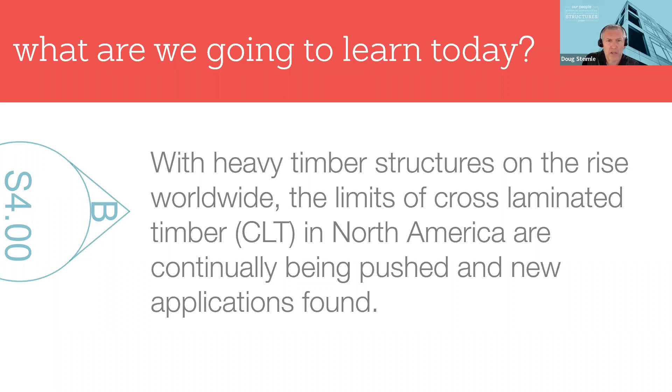So again, Candlewood Suites. This is actually on the Redstone Arsenal, which is a U.S. Army base down in Huntsville, Alabama. That's where this project is. We're going to learn about its material strengths, labor advantages, things like that. So why would we want to use this on future projects?

I do want to mention, CLT is cross laminated timber, and I'll get into describing exactly what that is. We're gonna address all kinds of aspects of what cross laminated timber is. But again, I'm going to assume that you know nothing. Hopefully, even if you do know something, you'll get some things out of this, I would imagine.

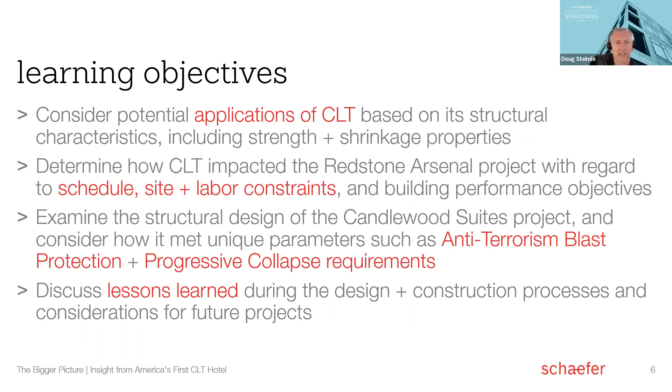So, cross laminated timber, here it is right there. Commonly known as plywood on steroids. The difference between cross laminated timber and, say, glue laminated timber is that the material goes back and forth in a crisscross manner. Glue laminated timber would have all of the members in the same direction, usually the same grade. It could be different grades of lumber, but essentially the same lumber, same glues. It's just how it's laid up.

But cross laminated timber can be manufactured, depending on the manufacturer, 10 feet wide, 65 feet long. Not everyone does those dimensions. In fact, I don't know that anyone does 10 by 65, but 8 by 65, yes, or 10 by 40, yes. So again, part of the reason why we need to really make sure we know which manufacturer we're dealing with.

So going into exactly what cross laminated timber is, one of the most important parts of the process is this very first piece, kiln drying the lumber to 12% plus or minus 3%. Shrinkage is a big deal. We're going to talk about wood shrinkage for a good chunk, because one of the benefits of mass timber is it doesn't shrink a whole lot, which is great. But that 12% is important. Typical kiln dried lumber, when you're buying it, is around 19%. So this is dried to a much lower moisture content.

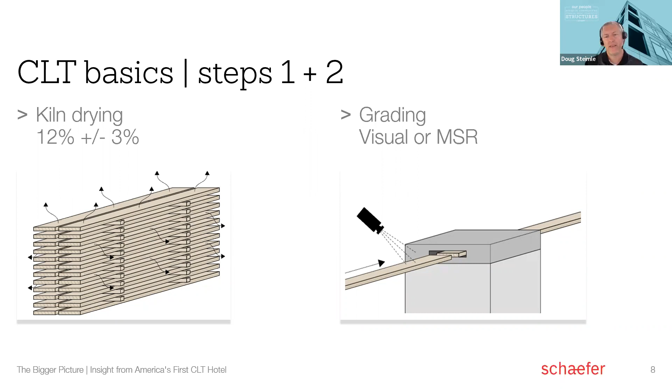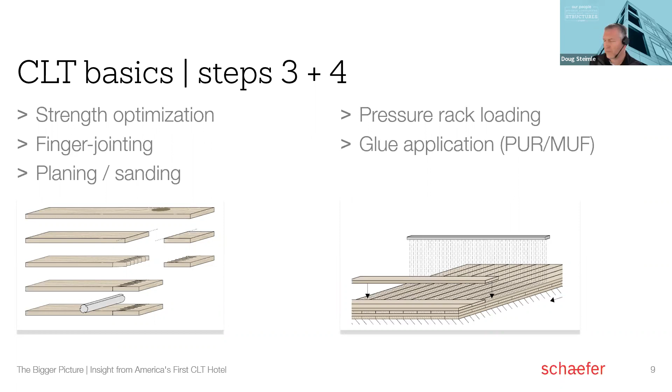Then the material is graded, whether it's visually or machine graded. And then it's finger jointed so that you can have a continuous stud as long as you want, and you cut it to the right length. Then you put layers of glue down between the two, you pressure pack it, and then you cut it to whatever shape you want. The precision of that cutting is just amazing. It's far more precise than really any other construction material out there. Steel, concrete, light gauge wood. This is obviously wood, but I'm talking about stick built wood. This is very, very precise.

In fact, one of the challenges of mass timber construction is how precise it is and how not precise the concrete foundations below it are. So you need to build in some flexibility there between the two.

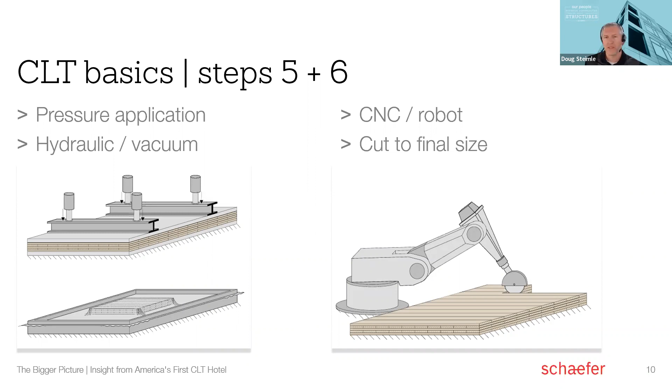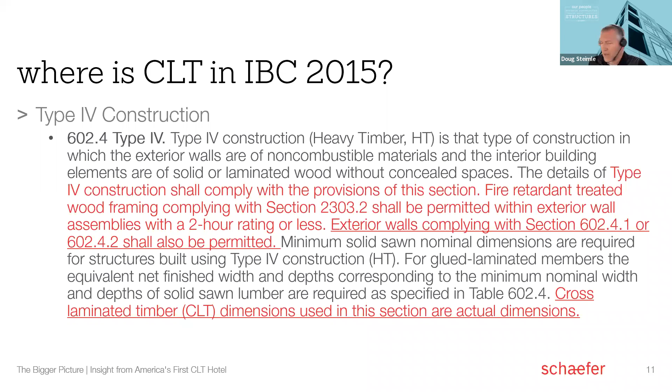So where is this in the code? It's actually in the 2015 code, under Type IV construction. I'm going to skip through that relatively quickly, but it's also in chapter 23. Chapter 23 references the APA PRG 320. That is the actual document that's used to define what cross laminated timber is. There's actually a newer version than what I've got shown there. So if someone off the street said, hey, I've got some cross laminated timber for you, well, it would have to meet those specifications.

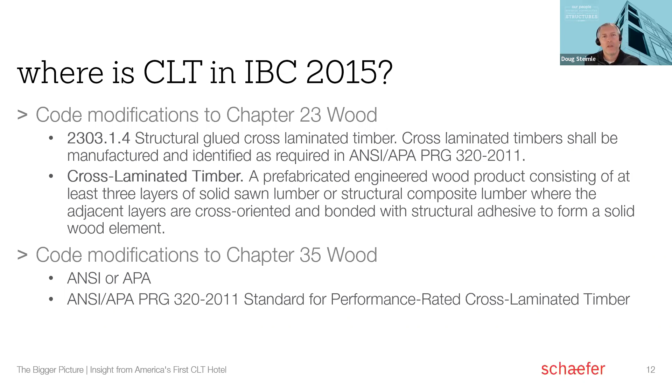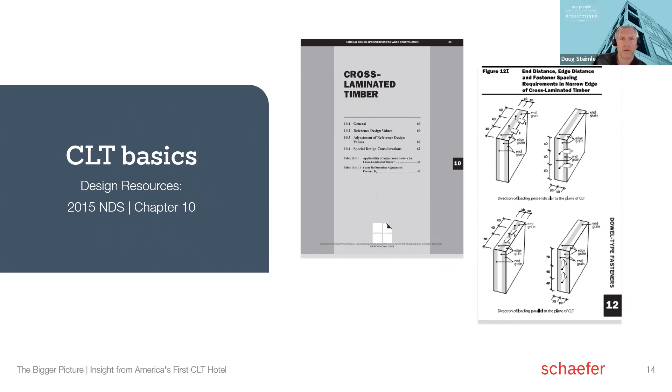The 2021 IBC is finalized, and there's huge changes in it, specifically regarding type 4 construction. Type 4 construction as it currently stands can go 6 stories tall. The 2021 IBC has taken type 4 and turned it into 4 different categories. There's HT, which is what it once was, and then there's the A, B, C categories. I believe type 4A corresponds to type 1A, so all the fire ratings you would have on a column, beam, that sort of thing, they match. And of course, type 1A construction is non-combustible and allows you unlimited height and areas.

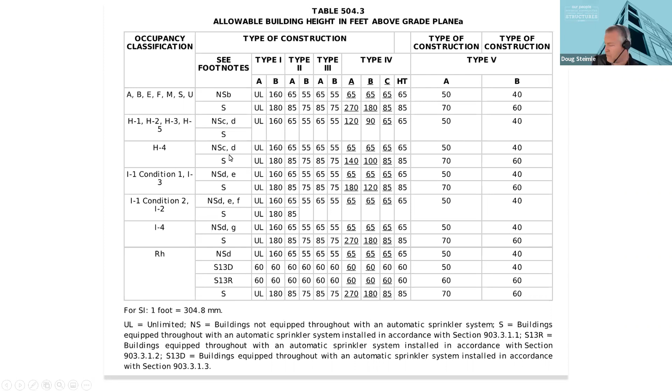The areas and height limitations for type 4A go much higher as a result. B is a little less restrictive, and C is even less restrictive. There's nothing allowed to be exposed in A. There is some allowed to be exposed in B, and even more allowed to be exposed in C. And HT is what it typically has been. So this allows you to go up to 18 stories tall with wood without doing any exceptions to the code.

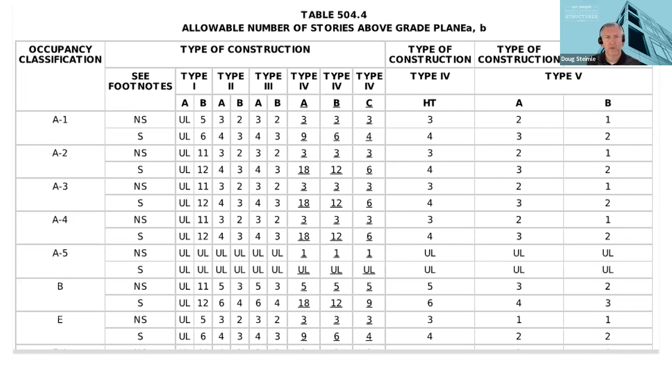And there are buildings out there that go even taller than that, or are getting built to go taller than that, so an authority having jurisdiction could say we can go taller. The reality is that the people looking at this initially thought there is no real reason why not. They just arbitrarily put it at 18, 12, and 9 for the height limitations for those 3 categories, to break people into the idea that you can actually go taller with mass timber, both from a strength and a safety perspective. So pretty crazy, huh? Hopefully you all already knew about that, but if you didn't, it really opens the world of mass timber to a lot of new projects now that you can go much bigger with it.

StructureCraft, I don't believe they do much manufacturing themselves. I think they do manufacture dowel laminated timber, but I think they more buy other people's product and then do design-build. There are also European manufacturers who absolutely play a piece of the market here in the US as well. I just left them out for simplification.

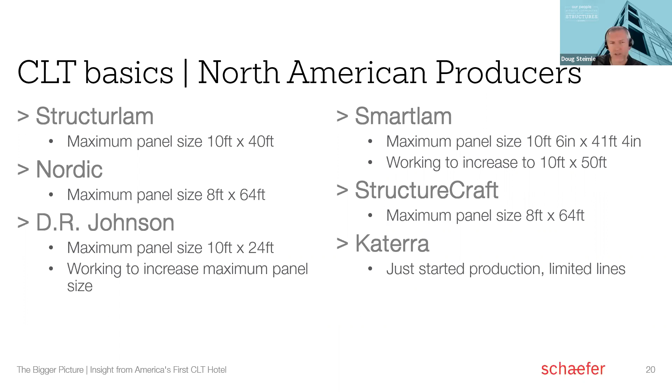And I have talked with the other ones as well, and at least as of the last time I talked with them, it is not an issue. But here are some of the different capabilities I mentioned as far as strength. I'm sorry, not strength, but panel sizes that they can fabricate. Again, these are probably changing as well over time as they get new equipment and stuff like that. So again, the point is check in with your local manufacturer, or whichever manufacturer. If you're going to do work on a project, check in with the manufacturer to see what you've got.

So this is a sheet right out of the PRG 320, and it's showing the different grades and different material types of cross laminated timber. The E would be for electronically graded, the V is visually graded, and the 1, 2, 3, 4. There's actually more than that at this point in time. So this is a chart from an older PRG 320, but those are just different types of lumber.

I don't remember which one's which, so there's hem fir, there's Doug fir, there's spruce pine fir, there's southern pine. And I think there might be Alaskan yellow cedar potentially. But again, it's really just different manufacturers. And then it's also showing you layups, standard layups.

Now, when I say a layup, I mean cross laminated timber will be 3 plies or 5 plies or 7 plies. They are typically odd numbers, and the plies are typically 1 3/8 inches thick. However, every manufacturer can modify that and have their own versions of what they provide. So they might have 2 different thicknesses of 5-ply material, one using everything at 1 3/8, one where maybe the middle plies are only an inch thick or something like that. So it got thinner overall.

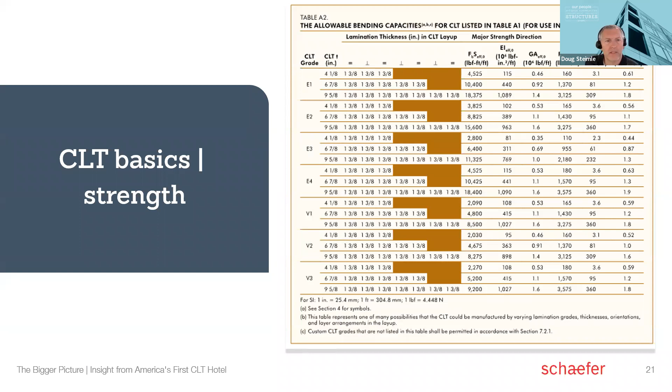These are a couple of charts that are no longer available on either one of their websites. I think the one on the left used to be on Nordic's website. It's showing 78 millimeter 3-ply, 105 millimeter 3-ply, again showing you 2 different 3-plies, 131 millimeter 5-ply and 175 millimeter 5-ply. I believe they still have the 105, 131, and 175, but they now have an 89 and not a 78.

But the point here is this is allowable bearing if you're going to use it as a wall. I wanted to just point out that it's really strong. If you had the 105, which is basically 4 inches thick, and 10 feet tall, the allowable capacity is 30,000 pounds per lineal foot. That's a lot of load.

The one on the right is Structurlam. Again, I don't think they have this on their website anymore, so I stole this quite a while ago. The 3-ply panel 10 feet tall was 21,000 pounds per lineal foot. So strength is usually not what's governing these panels. It's usually connections that's governing it from a wall perspective, or from a floor perspective it's vibrations, not strength.

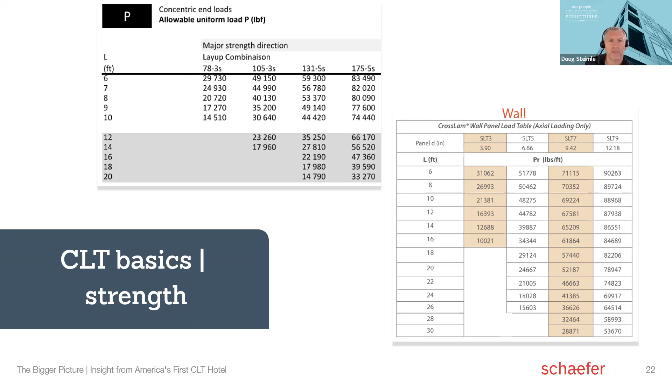All right, I got a poll question here, so maybe type into your thing, or if you want to unmute yourself, you can, and say the answer to this. Which shrinks more, wood or concrete? I'll give you the political answer, which is it depends. Oh, so why would you say it depends?

Concrete shrinks more initially, but after the 28-day cure, I think it stabilizes. Wood, I think, would react more to environmental conditions, ambient humidity, heat, things like that. It's an organic material. Yep. It's a living material. Yep. Okay. Well, you nailed it.

It depends. Now, from a concrete perspective, it actually continues to shrink quite a bit over the first year or so. It might be 90 days or so that maybe 50% of the shrinkage happens. But you're right, it shrinks more early on. Now wood, though, shrinks dependent on how much the moisture content changes. And you kind of mentioned that same thing as well to a certain extent. The relative humidity in the air.

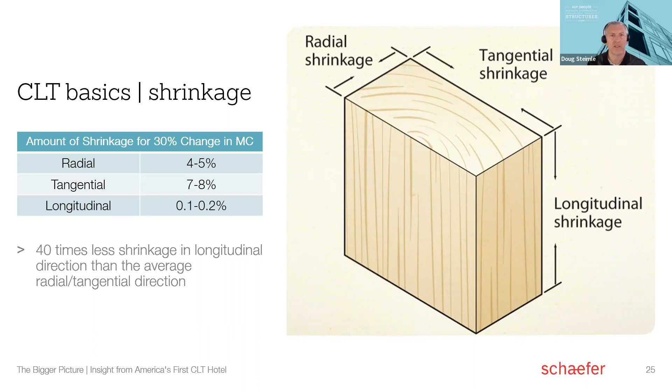Now, wood shrinks an awful lot in the tangential and radial direction. If you lost all 30% of moisture content, 30 down to 0, it's going to shrink 4 to 5% in the radial and 7 to 8% in the tangential, but very little, 0.1 to 0.2%, in the longitudinal. So along the length of a tree, it hardly shrinks at all.

Doug, I have a question for you. This is something that's come up with me working with certain types of wood that have been dried and then chemically treated, or dried and had processes done to them. When the moisture content is reduced down fairly low, sometimes when they get put back into a humid environment, there's some warpage, there's some cracking, there's twisting. Has any of this been an issue?

Now, I realize that cross laminated would sort of brace itself against that, but I'm just curious, if you started building with this in Miami, in an extremely humid environment, or in the South, are you going to have any warpage, any shrinkage, any cracking from that reaction? That's a great question. I have a picture that'll tell you the answer to that in a minute, and I'll refer to that one in a second. That's a fantastic question. So you bring up a great point.

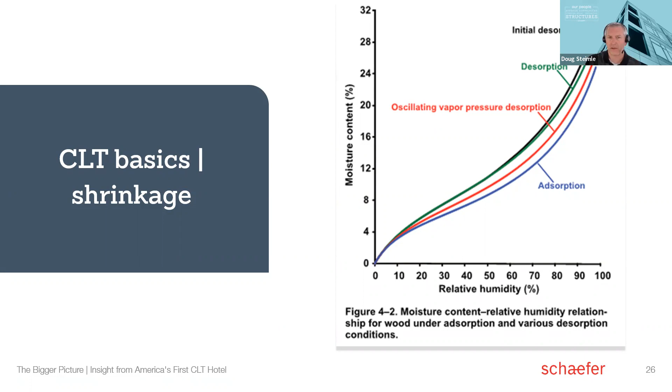And depending on the season, here in Cincinnati, it's pretty dry right now, so the moisture content in the wood is probably getting close to 6% or 8%. Whereas during the summer, it's going to go up to 12%. So it is going to get thicker and thinner depending on the season. So that is a great point you bring up there. And to answer your question, my next 2 slides will show you that. I did a shrinkage calculation on this 4-story building.

And the great part is if you're drying down to 12%, then you don't have that much more to shrink, because you've already lost most of the moisture content. So if you're coming down to a final moisture content of 8%, you don't have that much shrinkage that actually happens. Most of that shrinkage has already happened. So the thickness of a CLT panel, for every 10 inches thick, you'll shrink about 0.012 inches, so not very much.

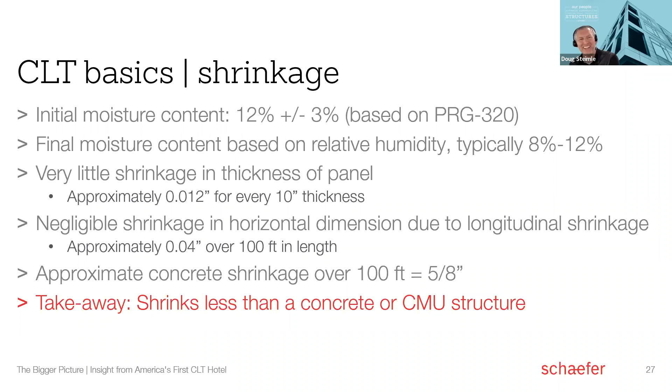Now, along the horizontal dimension of a panel, along that 100-foot length, if it's 100 feet long, you're only shrinking 0.04, because that dimension is restrained by the glue and the length of the tree, the longitudinal direction of the wood. So the takeaway is that concrete shrinks way more than wood.

Yeah, sounds like this would be more of an issue for places where you have exposed surfaces, where you're using the beam as a decorative element. Maybe you're using it as an architectural signature piece to divide spaces. You could conceivably have these cracks opening up. Yeah, you would definitely see these things. So if you had it as a wall, you wouldn't ever want to use this as the finished floor. Now a finished ceiling is fine, but you wouldn't when it is the finished floor.

And for that very reason, you don't glue these joints at all, because if you glued the joint, then you end up with a crack that's crooked down the middle. It doesn't hurt the strength of it, doesn't help the strength of it. So yeah, these gaps will open up for sure. So that table that I referenced here, it's not the greatest if you have plans out and you're trying to draw on it or whatever. You got a lot of ridges going on there, but it's great from a looks perspective.

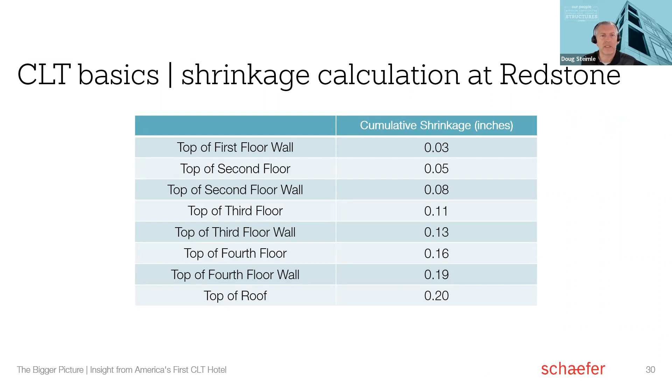So this is kind of a shrinkage calculation that we did on this project. The total building we anticipated to shrink 0.2 of an inch, whereas a typical 4-story wood building would shrink about an inch, about 1/4 inch per story. So that's significantly less, which is one of the reasons why I got interested in this in the first place.

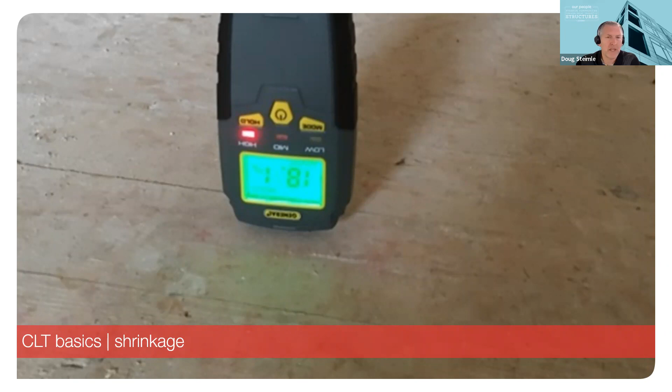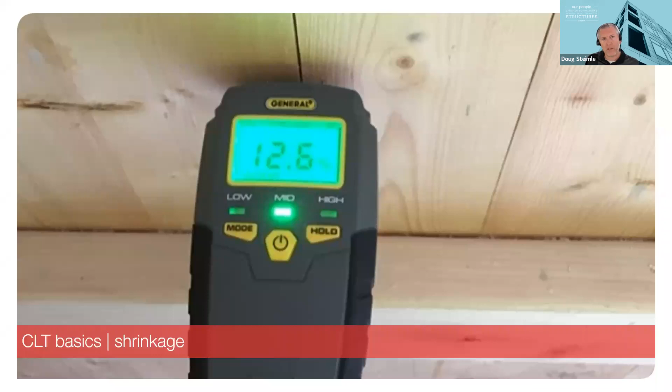This is during construction. It was 18.1 moisture content, because this was actually up in another project, Fort Drum, and Fort Drum is in upstate New York and had lots of snow, but the underside of it was normal moisture content, what you would expect. So the question is, did the cross laminated timber swell because it got a higher moisture content in the top? The answer to that is no. This is a picture showing the thickness of the CLT was 6 7/8. That's how it was manufactured. And as you can see in that picture, it is really close to 6 7/8, maybe a 16th inch that it grew. So the amount of swelling is still minimal.

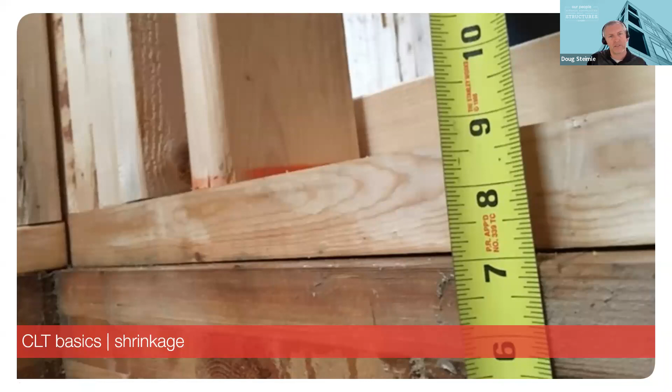Essentially, the wood is a bunch of straws, and the water wants to go in the end grain of those straws. So it would want to come in kind of down in here, not so much sitting on top. It doesn't really penetrate much of the wood going straight down through the top. So it didn't really affect the moisture content overall.

These are some of the main reasons why you would want to use mass timber or cross laminated timber: acoustics, building performance, speed of construction, dimensionally stable, like I mentioned earlier, extended construction season, less labor, light weight, less foundations, lighter cranes, highly mechanized production.

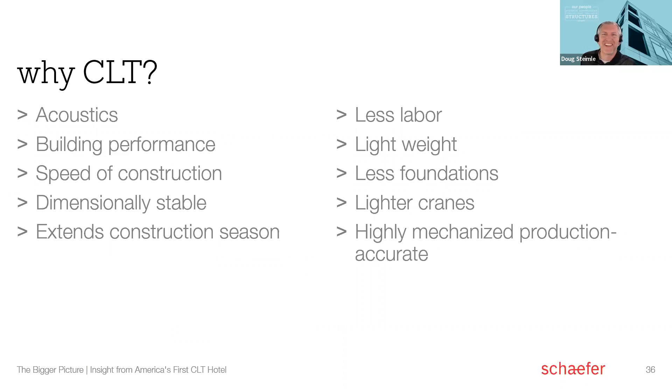The reduced on-site inventory, meaning that all the product comes at the time that you need to just put it into place. Not every manufacturer does that. Not every project happens like that, but you certainly can plan it so that the product gets there just in time and you erect it just in time.

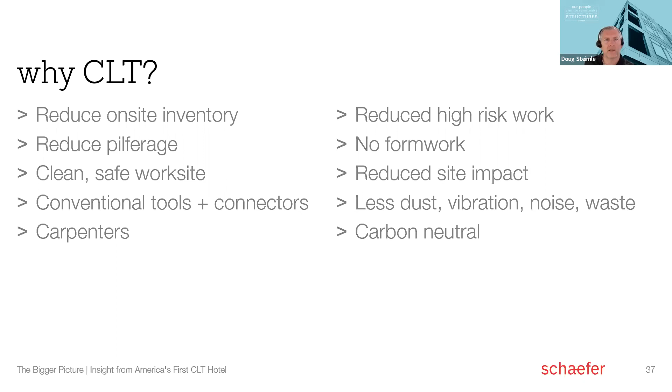Now, if you get it from Europe, that's not going to happen. It's going to come in a bunch of shipping containers, and so you're going to have to figure out how to get everything out. And they can still put it in a certain order, but it's not going to be the just-in-time kind of a thing. You just need a bigger site. But it does use carpenters, the conventional tools, nothing crazy going on there. It's a very safe project as well.

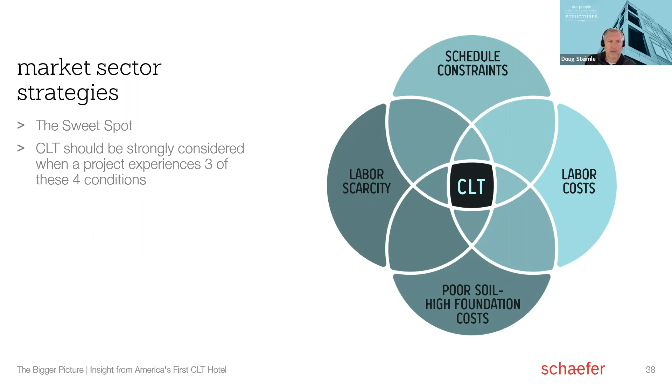So Lend-Lease, who was the developer on this and also the contractor, had some good, nice takeaways. They basically said, if you have 3 of these 4 conditions, you should consider mass timber as a possibility. It may make sense. So schedule constraints, labor scarcity, labor costs, those are very much related. And then poor soil foundations, because you're going to have a lighter building and therefore you can save some money on your foundations.

In general, I don't think mass timber does a great job competing in the 1 to 5 story world. If you're talking just pure cost of construction, stick built wood framing is always going to be cheaper than this. But once you start getting outside of that realm, 6 to 10 stories or even taller, then it really starts to make sense. It's meant to compete with steel and concrete structures, not with stick built wood structures.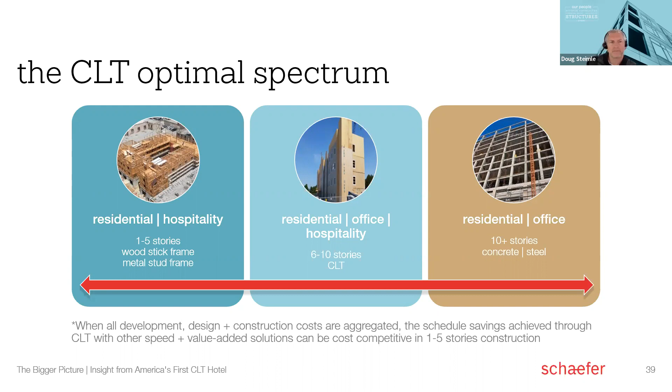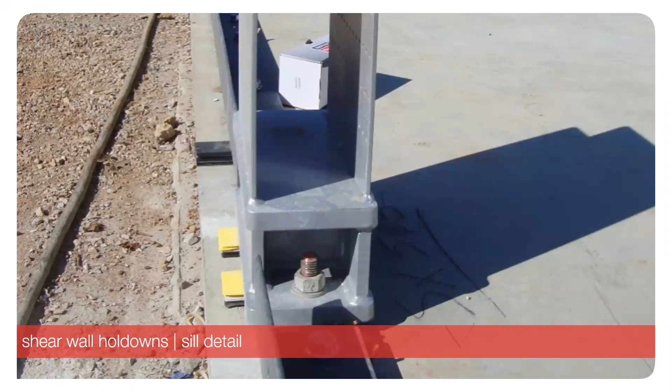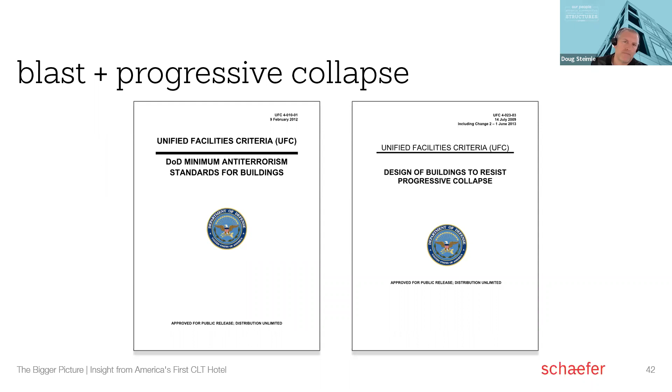Yeah. Yep. So here's a picture of a shear wall hold down. So we mixed in some steel to kind of tie things together. We did design for blast and progressive collapse. I don't know if anyone here cares much about that, but just real quickly, the blue areas are where we had to take out chunks of wall, and the building had to still stand. So chunks of wall, a story at a time.

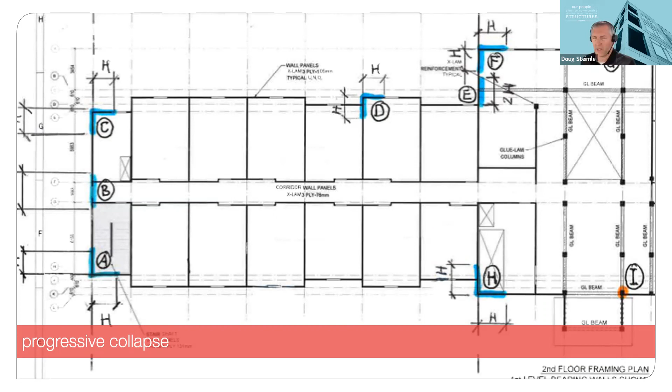If you took out a ton of it, then obviously no one expects it to survive. But if it's a relatively small blast where it's taken out part of the building, then it's meant to survive. So we took out a chunk, and believe it or not, it was relatively easy to make it work because it's basically a big beam. We just had to stitch it together really well. This picture shows some of the shop drawings and the stitching together, but I realize you can't see that, so just take my word for it.

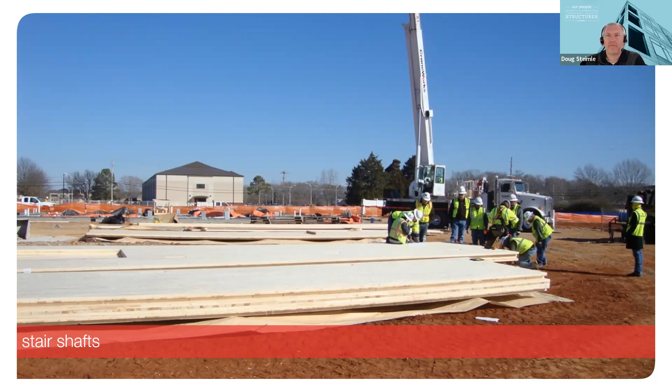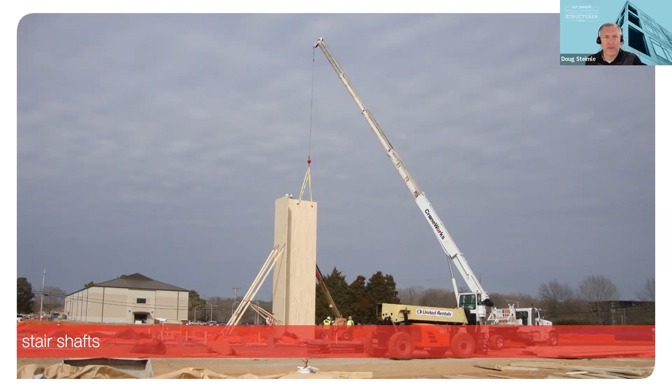All right, so here's some pictures of the stair shafts going up. This is something I think is a great application in general for mass timber. You can get the fire ratings pretty easily with it, and it goes up relatively quick. Here's a picture of the glue laminated timber columns, glue laminated timber beams, and cross laminated timber walls. On this project, there were far more cross laminated timber walls than we probably needed, but that's what the owner wanted. They wanted to go all in on this.

But like I said, we mixed and married cross laminated timber with glue laminated timber. You can see all the holes pre-cut in the beam. So if we can make that coordination ahead of time, get all the MEP figured out, then we can get that all cut in, and they can run it right through those areas. You can certainly also mix and match steel in here, as you can see. This could have been glue laminated timber going across there. That wouldn't have been a problem, except it would have been deeper, and then headroom would have been a problem.

So sometimes it makes sense to mix and match in some steel as well, although it's less desirable to have steel involved, because sometimes you need to then have a steel manufacturer. If your wood manufacturer can't do the steel themselves, then it's probably not what they do. So more cooks in the kitchen makes it a challenge.

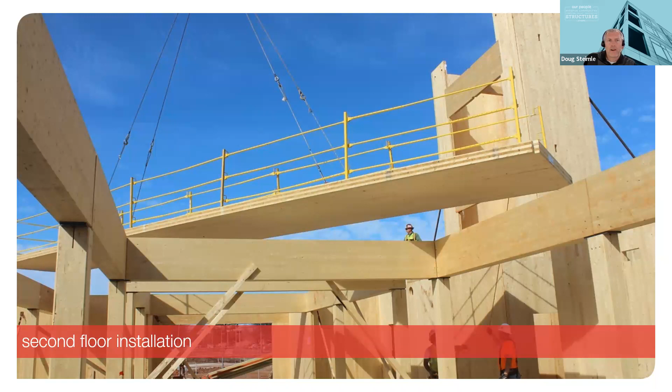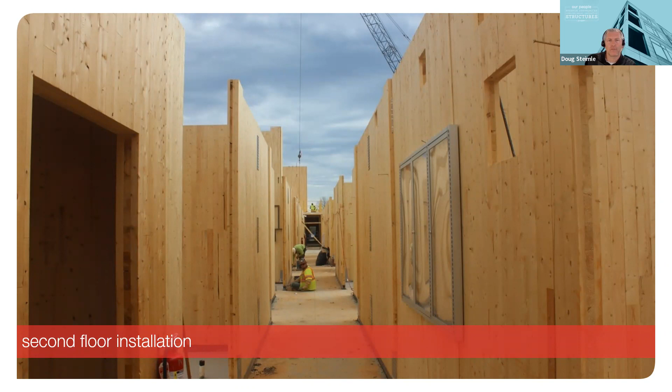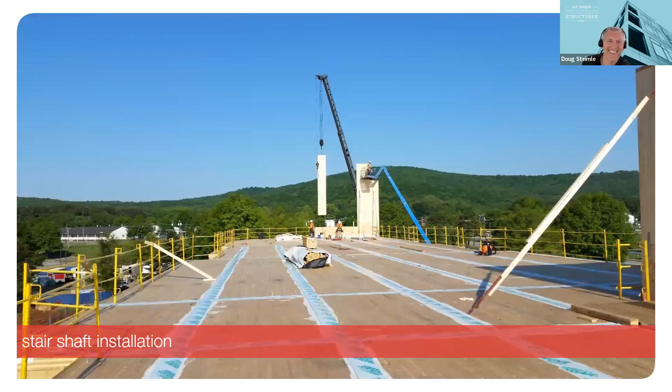Here's some more pictures of cross laminated timber being flown in. There's a picture down showing all the walls down the corridor. There's a picture from the underside of the stairs, because the stairs themselves were very dirty. Much prettier from the underside. Here's a picture of a floor.

So these, you can see the splines in terms of how the panels are kind of tied together. So the splines are typically they route out either 1/2 inch or 3/4 of an inch to allow for you to put a piece of plywood in, and then you nail the plywood down to either side. And that's typically how they get fastened together to create your diaphragm. They get the load to the shear walls through the very stiff floor there. They obviously put waterproofing on it to try to keep the water out from the building down below.

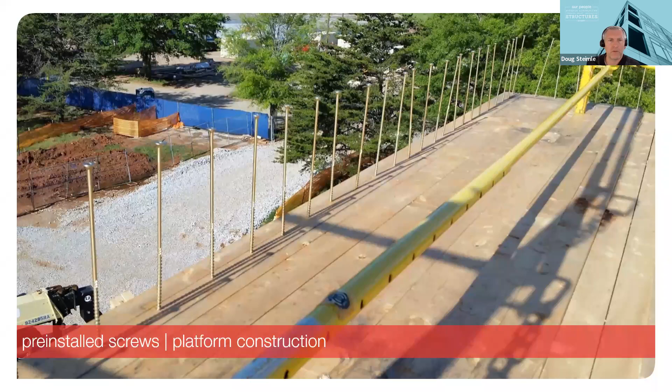Here's pictures of a ton of screws getting put in. As I mentioned before, we were designing for blast. Blast is very high loads, and so this is way more screws than a typical project for how you would fasten them together. How long are those screws?

Well, you can get screws that are very long. These would have been probably 12 inches long. Okay. It's just the perspective of trying to get a sense of scale from that picture. Yeah, right. So the panels that were used here were 7 inches thick, or 6 7/8. So you need 7 inches to go through that, and then probably 4 inches or so into the panel below, the wall below. Yep. And then we did the same thing coming up. So it had a lot of screws on this one.

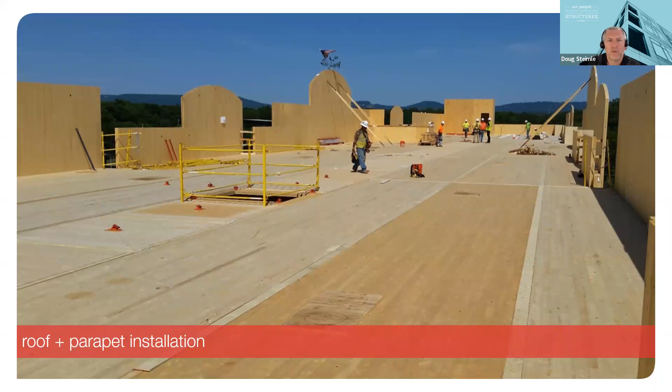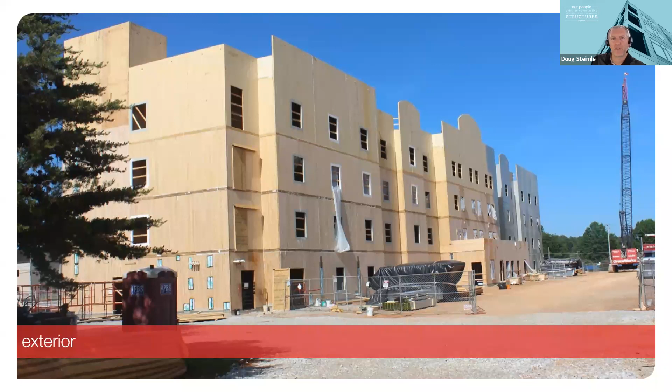Here's a roof showing kind of, we did cantilever up the walls. Now the really tall walls, we didn't cantilever up. We had structure behind that bracing it, but the shorter ones are just pure cantilevers up. There's a picture from the outside. And there's a finished picture.

I love this one because you can tell the different color of grass. Some of it's really green, some of it's not. And that's because grand opening was in the wintertime, or maybe springtime, I believe it was, like end of March or beginning of April. And so they spray painted the grass green to make it look good.

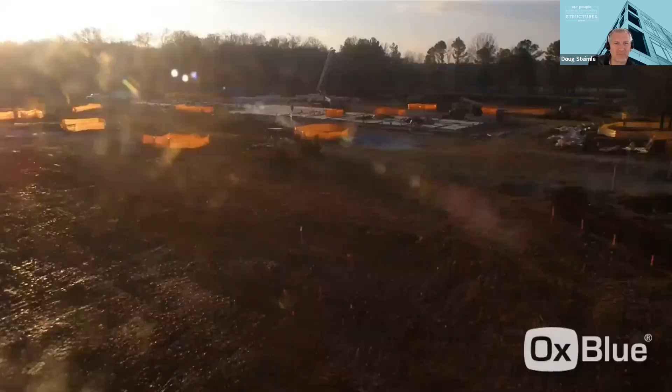No one ever does that for publicity photos or anything like that. No, right. I don't know what you're talking about.

Right. Given the high profile nature of it, right? That first government building built out of CLT. So yeah, they wanted to play it up big.

So here's a time lapse video of it going up. You can see the first stair go up. Now the first stair, I think, took them 18 to 20 hours to put up. The second one, I think it was 14 or so hours, and the third one was like 8 hours. So they definitely were learning on the first one, and they started to become much faster. As I mentioned, speed of construction is important.

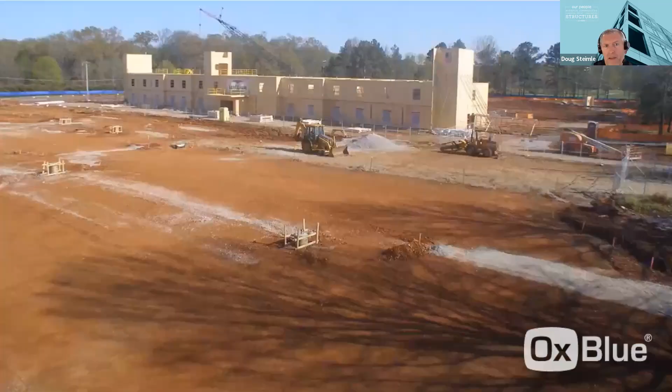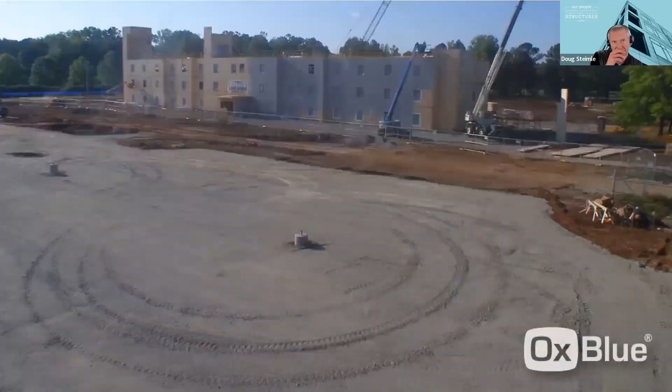And so one of the things they did to increase speed of construction was, if you see those white panels that are popping up across the screen, those are actually pre-manufactured bathrooms. So those are going in as they're going up with the floor, and then they basically have finished bathrooms done. They just have to hook up the plumbing above and below, real easy, and I think hook it into the electric, and they're done. They have finished drywall, painted, light fixtures, bathroom fixtures, all in there. So it certainly helped with the speed of construction.

Was this particular contractor experienced using CLT, or was this his first job using CLT and he was learning as he went? First job. And they spent quite a bit of time learning. And when I say they, there was the wood mafia group of about 5, but two of them were actually the guys kind of leading the construction end of things.

I call them wood mafia. They're my friends, but they're good guys.

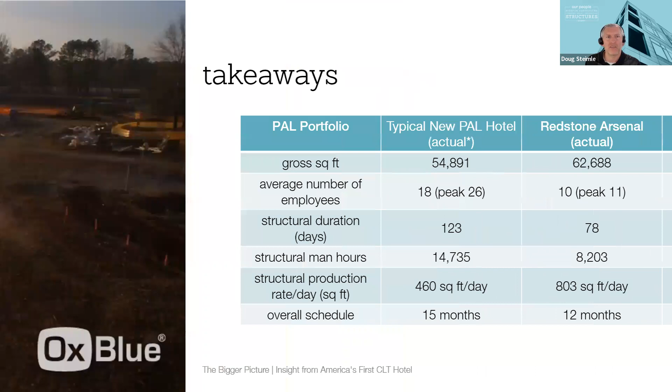But the interesting part, that's a great question. So I mentioned that there's only 10. So here's one of the good takeaway slides here: they compared this building to a 54,000 square foot light gauge building that they also did similarly. And our building is 62,000 square feet, so it's 14% bigger. But the average number of employees was 43% less on ours than the other projects. So that was up to 26. We were up to 11.

The structural duration was 123 days for the smaller building, and ours was only 78 days. So that's a significant savings. The man hours were way down, 14,700 to 8,200. And so the production per day was way up, and they saved 3 months total on the schedule. So that's significant. I don't know any owners that wouldn't love to save 3 months on a construction schedule. Nice.

Do you happen to know who did the bathroom pods? I have a question if it was Pivotek, but it is Pivotek. Yes, they're local here in Cincinnati as well, believe it or not. Somebody was asking, since you are from Cincinnati. Yeah, I think it was just a coincidence though, because I'd never worked with them before that project. So I don't know exactly how everyone married up, but it worked out really well.

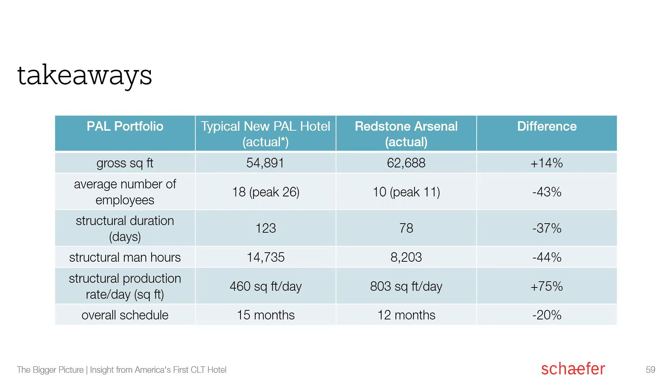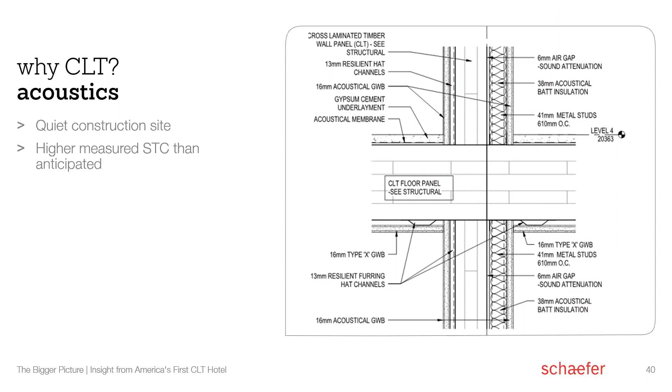Now, one of the things that I'm curious about is essentially you've got a solid wall structure. So electrical conduits, things like that, are those running on the surface of the walls, or are you furring them out? So if you go back to the architectural section that I had shown, it would run through the furred out portion of the walls, or through the ceiling. They used a little bit of a furring channel there. Okay, great question. Because nobody really likes surface mounted conduits.

No one does like that. At least no one I know that's going to admit it. Right.

So getting back to your point about the labor, at the very bottom here, one of the things that they were very proud of. On a U.S. Army base, labor scarcity is really a challenge, because not just everyone can go onto the U.S. Army base. So eight of their 10 people, I believe, were unemployed veterans that they upskilled. They didn't know hardly anything about construction. It was 8 of the 10 people didn't know anything. They could listen to instructions well, and they were hard workers, and that's all it took to build this thing well and build it fast.

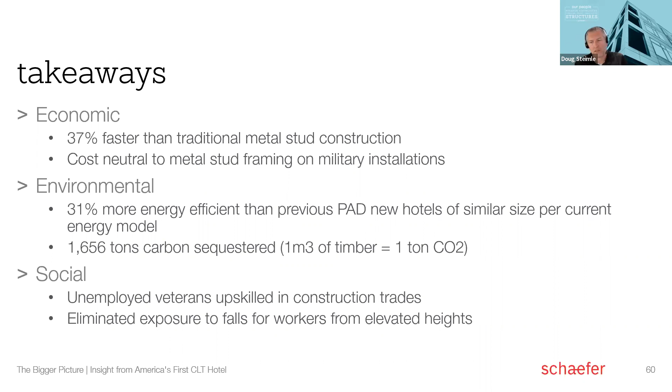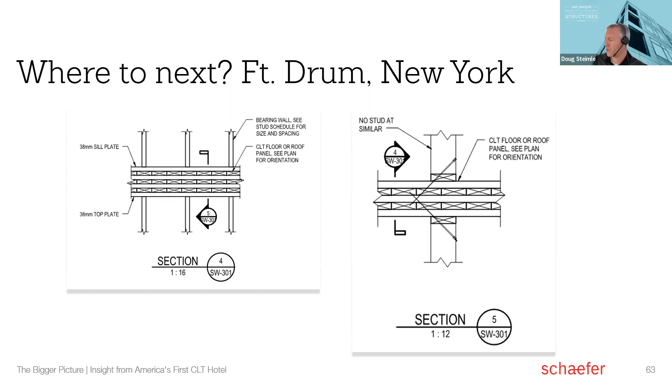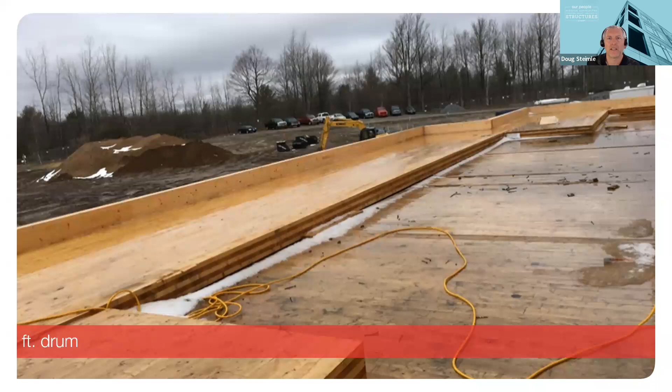So what's next? What's key here is that we keep the initial cost low, the operating costs low, speed and efficiency, acoustics. I'm gonna go to this project here, Fort Drum. We eliminated a lot of the CLT interior walls on this one. We kept all the exterior ones because they work really well for blast. But on the interior, we got rid of most of the walls and just used stick framing, but still used cross laminated timber for the floors. Here's some pictures. This is kind of a roof that cantilevered out. Got to go out to the site. That was in 2018.

Very efficient building. You mentioned shafts, and I'm just curious. Are they running elevators in these structures? Have you run elevators through laminated timber shafts, and is that a concern? Because elevators are notoriously fidgety. No, not a concern at all. Yes, we did both of these projects. I don't know about the MSU project, I don't believe that was in a CLT shaft, but all the other ones are CLT elevator shafts and stair shafts. Works great.

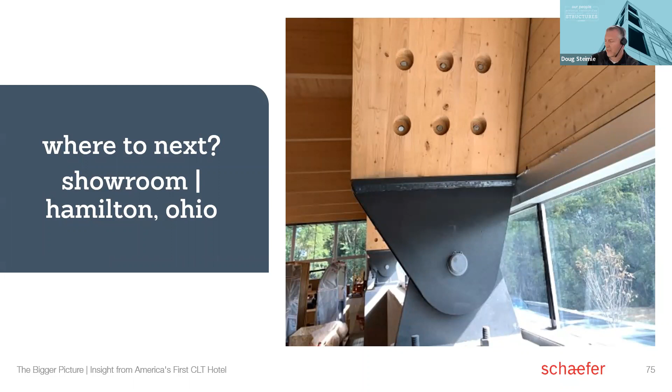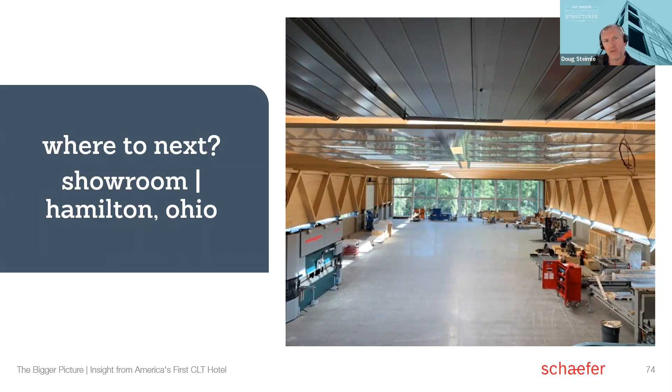Yeah, I mean, who doesn't love something like this? I'll just keep talking about this showroom for a little bit. The whole rationale behind making this showroom the way they did is, well, for one, you can see out the end. There's your steel columns in there, and then glue lam beam up top. If I went back to this first picture, you can see that maybe a little bit better. So there's our steel columns in there and a glue lam beam up top, and we created a steel glue lam moment frame out of that, which is really unique, really different, really fun.

And these guys manufacture equipment. They basically sell manufacturing equipment. Their manufacturing equipment bends steel for things like refrigerators or washing machines or whatever. So if I were a manufacturer of a washing machine, I might come into their showroom to see them make the parts that I need made on their machine that they're trying to sell me. So it's kind of trying to communicate that, hey, we're very creative people. This is a very creative structure that we're in, and our machinery is pretty amazing.

Nice. Yeah, we do have a question. It says some of these projects at the end were 2 to 3 stories. You mentioned 1 to 5 stories was not as cost effective as higher projects. What drove the owner to CLT on the MSU and the Hamilton projects, if you know?

Yeah, so the Hamilton one was the Italian owner, and they had built one similar to this out in Italy. So they wanted to build this one the same way. And you can imagine the difference of someone coming into a pre-engineered metal building, which is what they were building onto. Their showroom used to be inside of a pre-engineered metal building. It's clean, not bad for a pre-engineered metal building, but there's a different wow factor when you come into a building like this. So that was their rationale.